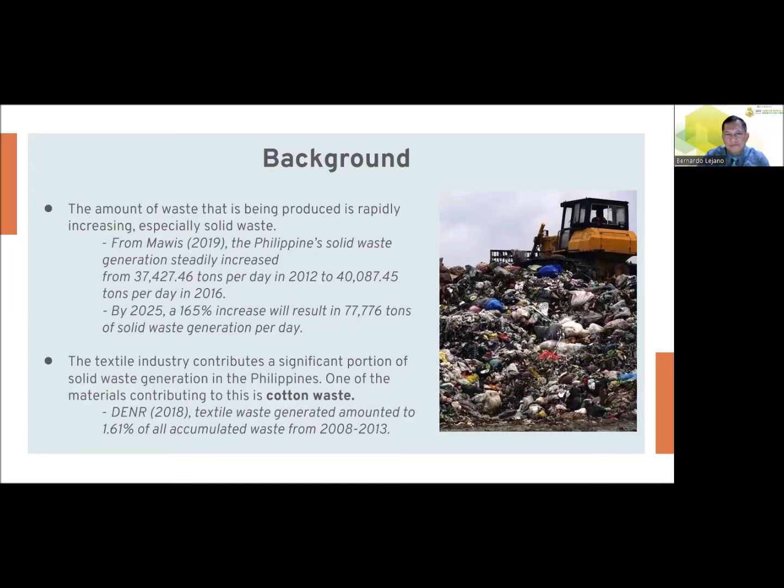The construction industry is also a major contributor to pollution, producing 39% of the world's CO2 emissions, and this pollution is expected to increase as more land develops. In response, innovative and environmentally friendly materials are being developed with two goals in mind: one, to improve performance, and second, to reduce the amount of pollution generated in production.

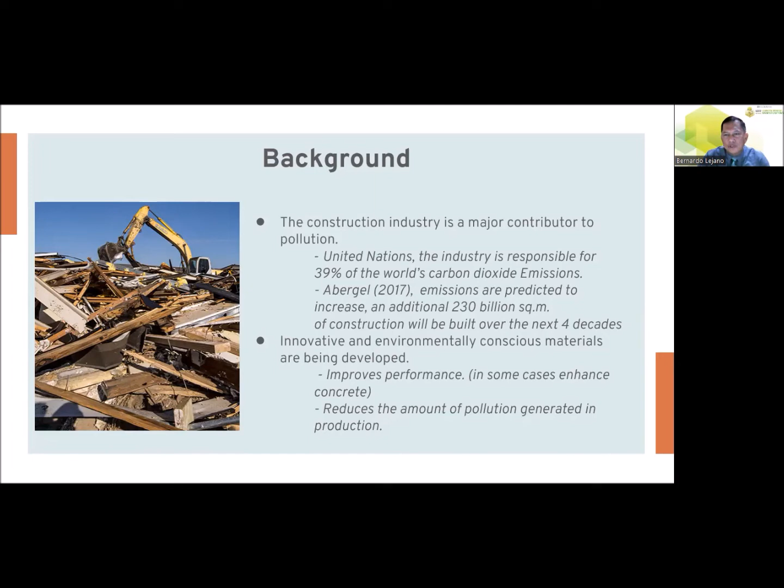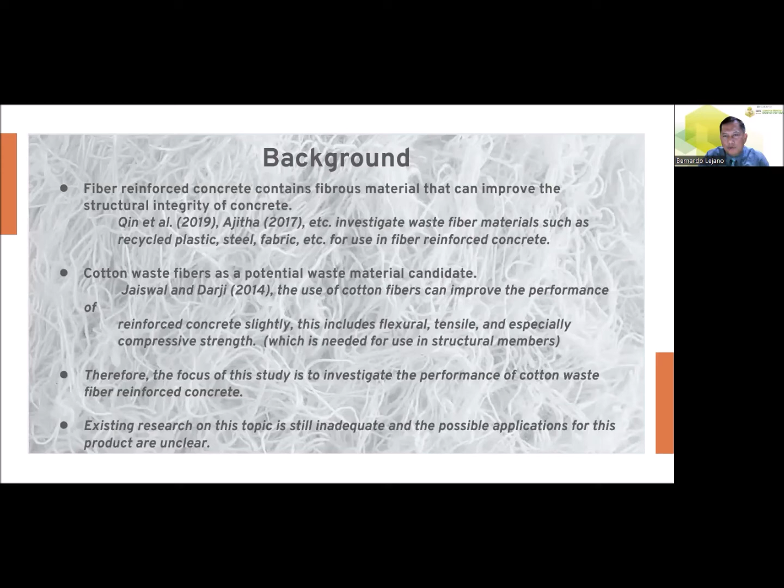One of these innovations is the introduction of waste fibers in concrete. Cotton fiber reinforced concrete in particular showed potential in the few existing studies on the topic. In light of this, we decided to investigate the performance of cotton waste fiber reinforced concrete.

So, in order to address the problem of waste and pollution generated by construction, cotton waste fibers are researched to find out if they can be proven as a reliable construction material, as this would greatly reduce the amount of cotton waste.

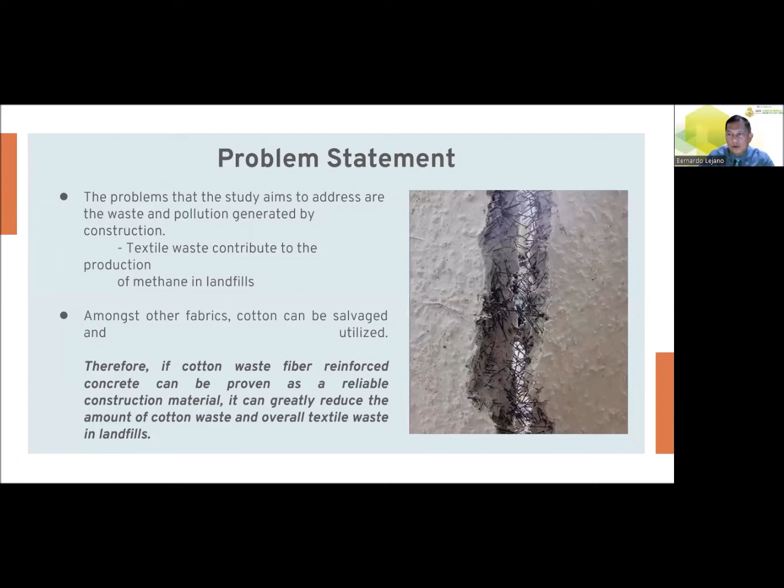The main objective of this study is to analyze the use of cotton waste fibers as reinforcement in conventional concrete. The specific objectives are: one, to evaluate the workability of varying amounts of waste cotton in concrete; two, to evaluate the compressive strength of varying lengths of cotton waste fiber in concrete with a target compressive strength of 21 megapascal; three, to evaluate the splitting tensile strength of varying lengths of cotton waste fibers in concrete; and four, to conduct a cost analysis comparing waste cotton fiber reinforced concrete to conventional concrete to find the more economical material.

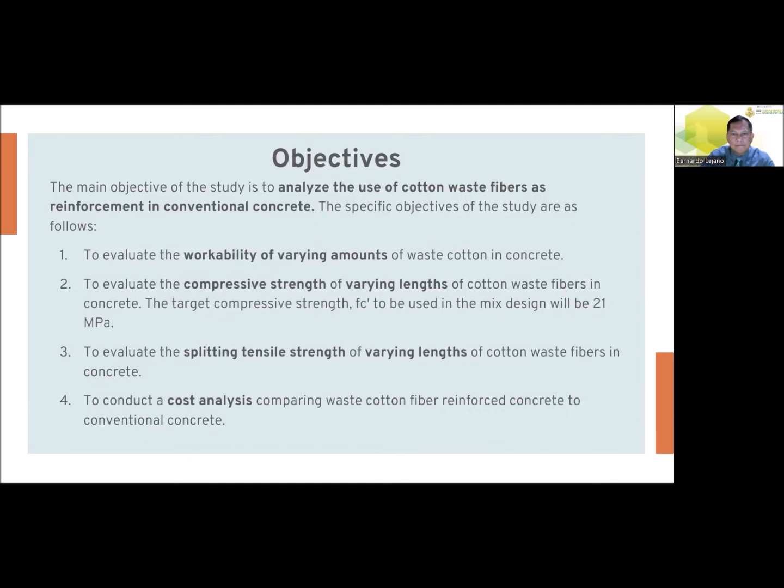As for the next part, here's where the review of related literature will be discussed. A table summary of the parameters and the related literature chosen was created to see the types of fiber used, the fiber amount considered, and the fiber length chosen across all the studies. It is seen that the material used varies.

Fiber materials used in the related literature are polypropylene, cotton, nylon, wool, jute, and oil palm fibers. As for the fiber amounts considered, the amount seen is based on cement weight, concrete weight, or volume of batch, and can vary from 0.0% to 1.8% depending on the study.

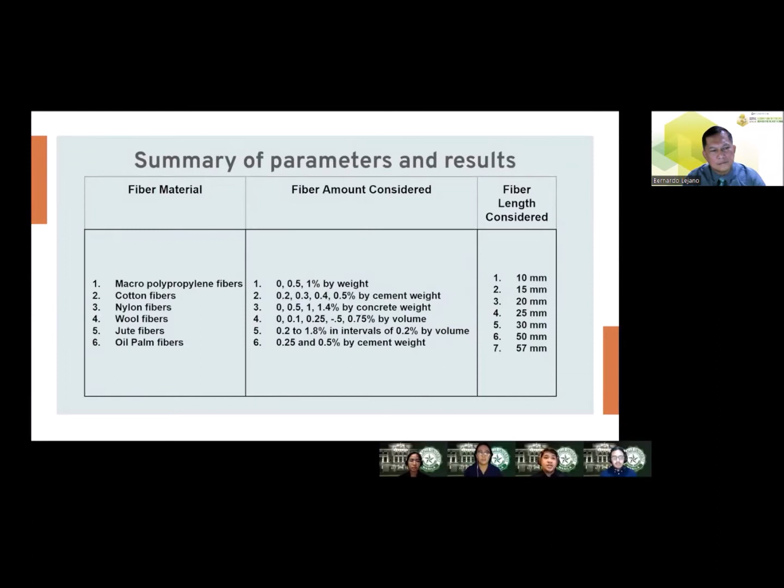Across all the literature, specific fiber lengths were studied as well, ranging from 10 mm to 57 mm depending on the study. It is to be noted that the related literature regarding cotton fibers does not consider varying fiber lengths.

For our research methodology and design, the research method involves analyzing how waste cotton fibers affect the strength properties of concrete through the use of ASTM standard testing methods. The independent variables include the water to cement ratio, length of fibers, and amount of fibers, and these variables will be checked to see if they affect the testing properties of cotton reinforced concrete.

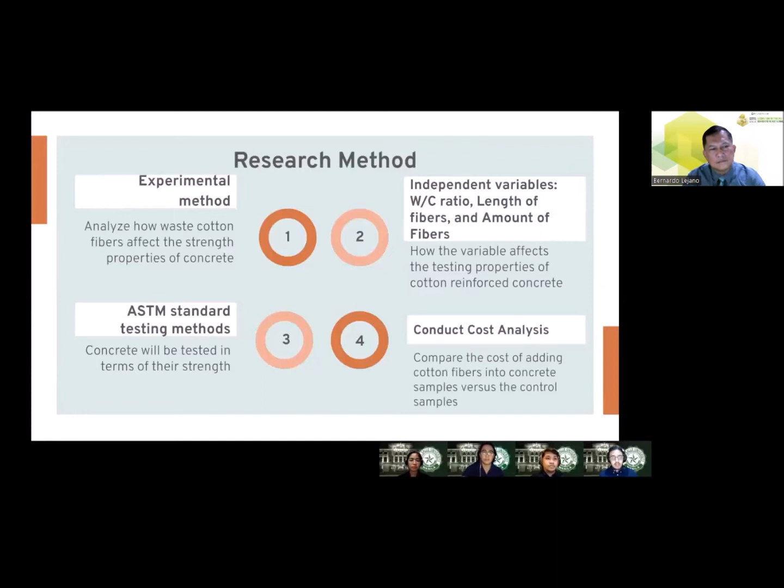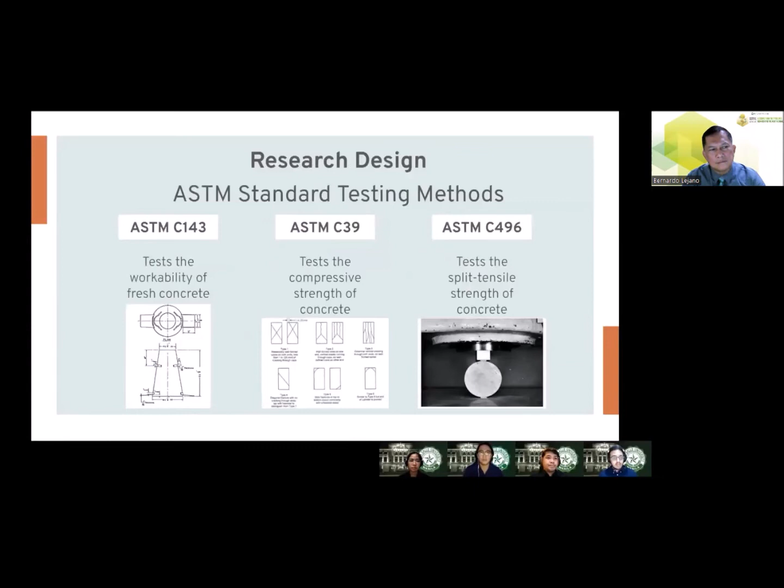Finally, a cost analysis will be conducted to determine the cost effectiveness of different concrete samples versus the control samples. There are two stages to the experimental method, the first being the workability test to determine the samples to be used for the second stage, which includes the compressive and split tensile strength tests.

The dimensions of the concrete samples for both the compressive and split tensile strength test will make use of 150 millimeters in diameter and 300 millimeters in height.

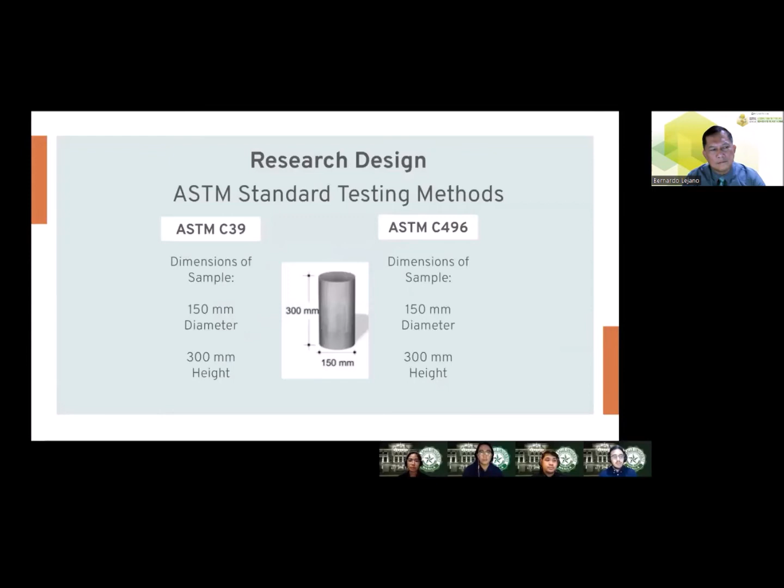As previously mentioned, these are the independent variables, and in order to test the effect of these variables on the strength properties of concrete, a control of conventional concrete will be made.

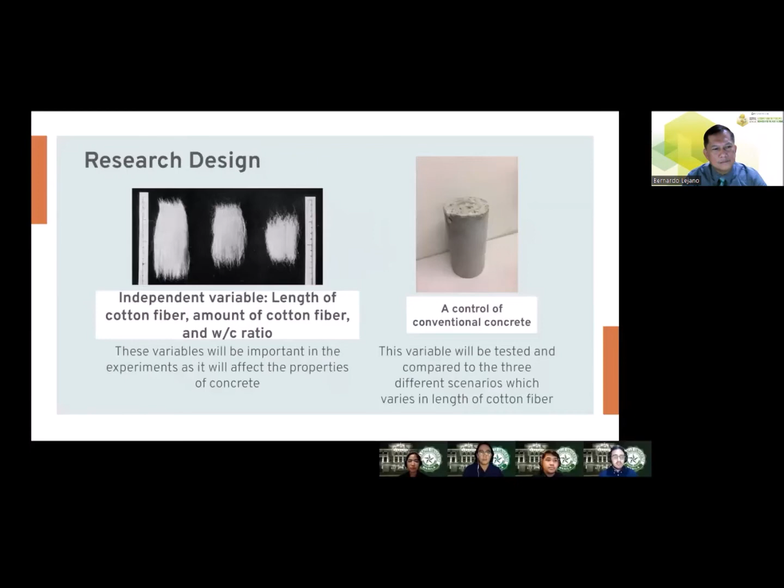Stage one determines the water to cement ratio to be used for stage two. For stage two, each case refers to the chosen water to cement ratio of the previous stage. As seen for each case, a compressive strength test and a split tensile strength test is required.

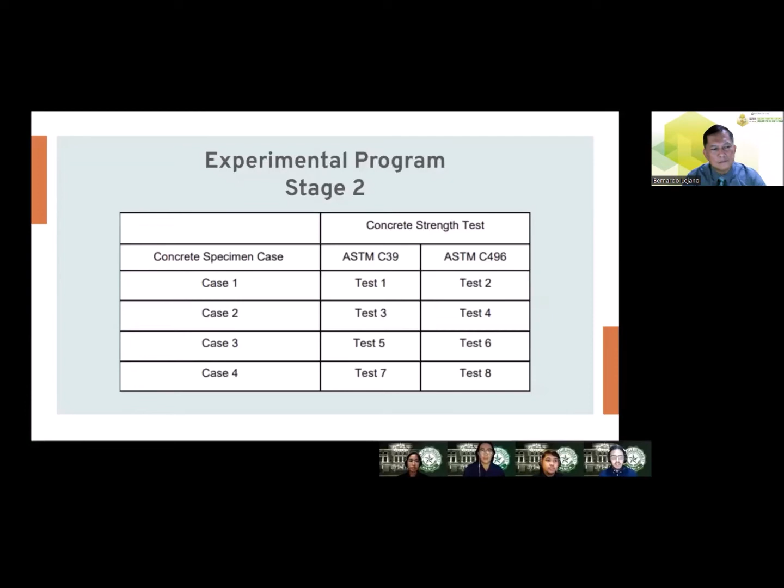From the previous table, there are 4 cases per strength test, and 5 trials were conducted for each case, which totaled to 40 total trials for stage 2.

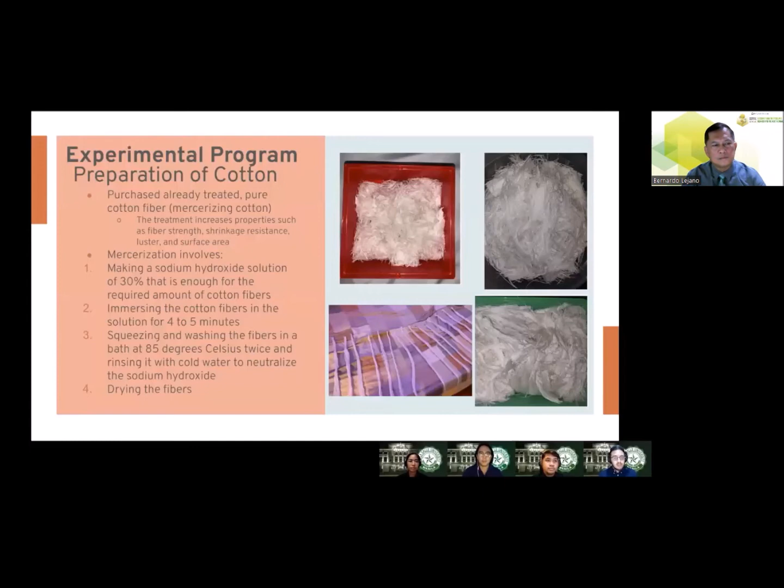For the preparation of cotton, the cotton used for the experiment was already treated using mercerization, which increases the fiber's strength, shrinkage resistance, luster, and surface area of cotton. Mercerization involves immersing the cotton fibers in a sodium hydroxide solution of 30%.

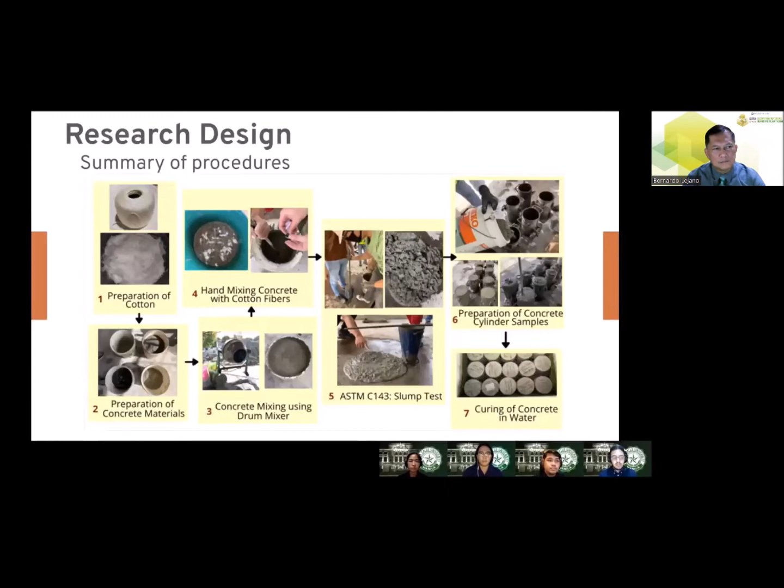For the summary of procedures, start with the preparation of cotton, mixing of concrete, transferring the mix to industrial pails to distribute the fibers evenly, conducting the slump test, and then the preparation and curing of cylindrical concrete samples. After that, the samples were then placed in a compression test and a split tensile test.

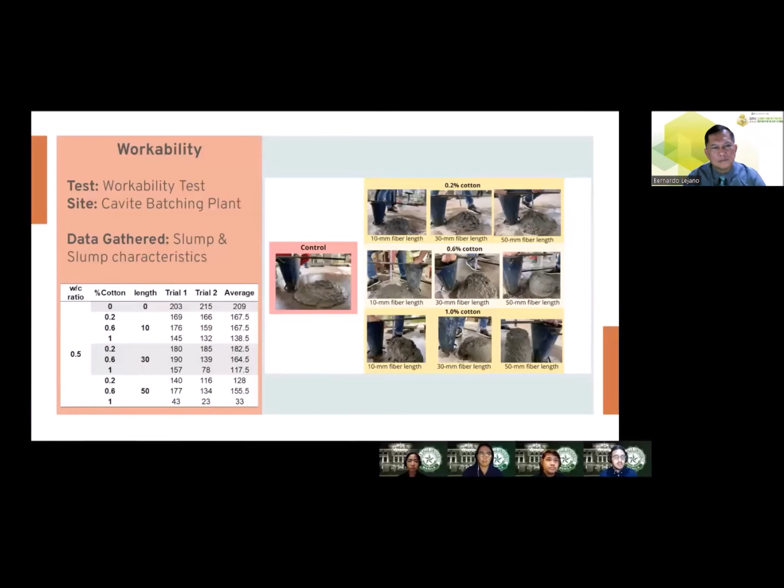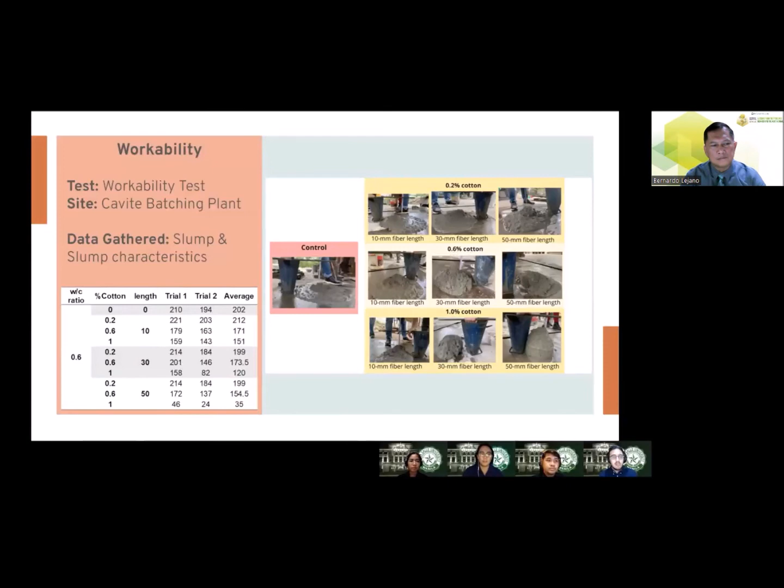For the second set of results are the workability results of the water to cement ratio of 0.6 with varying amounts of cotton and fiber lengths. For each case, based on the independent variables, 2 trials were conducted and the average was obtained.

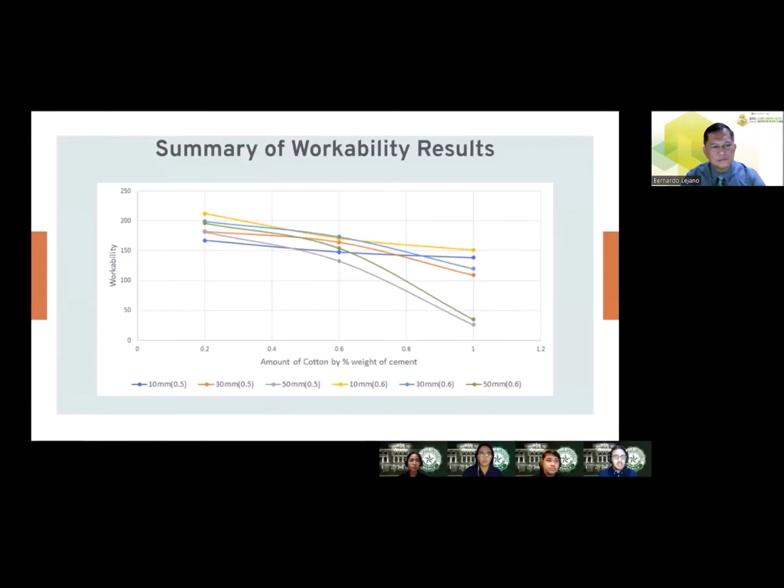Based on the results, it can be observed that the higher water to cement ratio yields a higher workability, and that the increase in the ratio of water in the mix resulted in an increase in the workability. It can also be observed that the workability decreases as more cotton is added into the mix, and there is a steeper decline in workability for longer cotton fibers as more cotton is added.

Based on the graph, the 0.6% amount of cotton yielded the best results when it comes to achieving the target slump. Therefore, this was used for stage 2. As for the water to cement ratios, the 0.6 water to cement ratio was adopted for the concrete cylinders for stage 2, as this showed the higher workability.

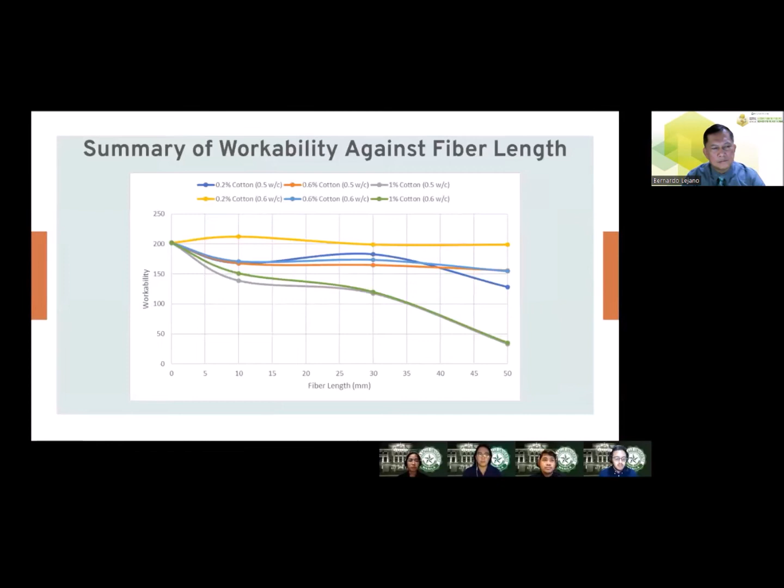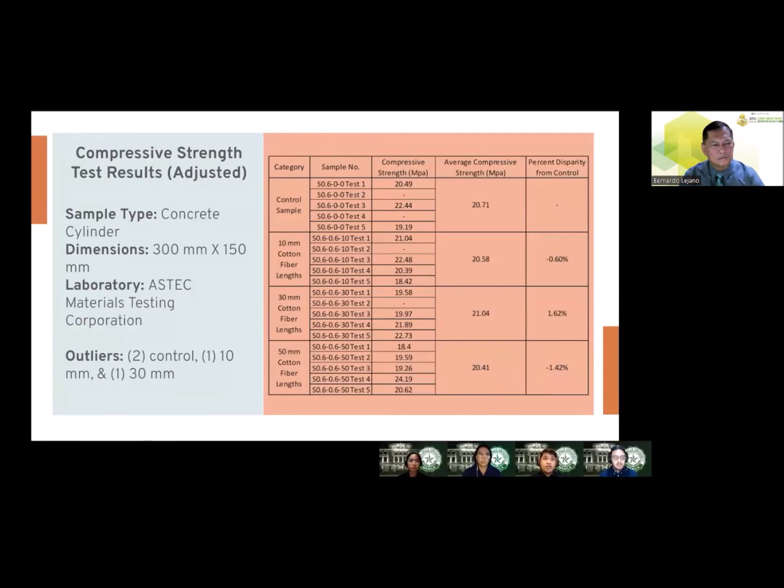To further visualize the differences in the strength, here is a graph that shows the comparison of the 4 cases. The results show that the use of 30 mm cotton fibers yielded the highest compressive strength, while the use of 50 mm yielded the lowest.

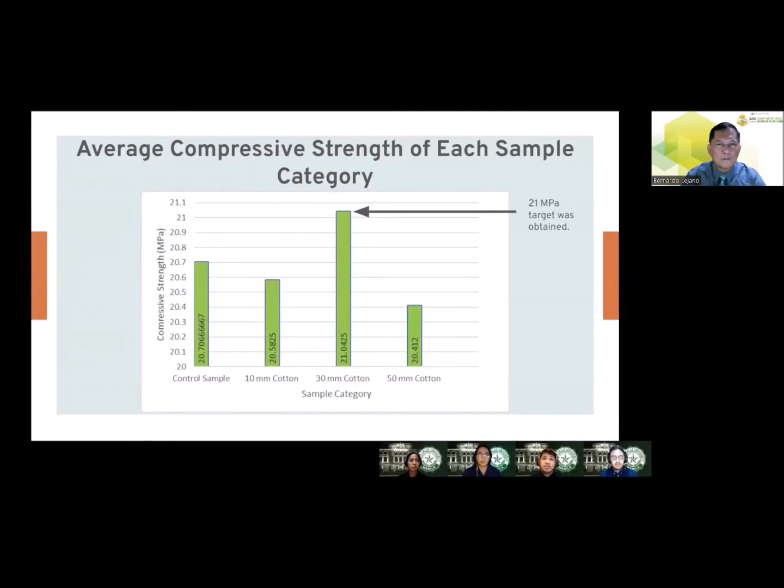Though the differences between the cases are minor, it is to be noted that the 30 mm case reached the 21 MPa target of the study.

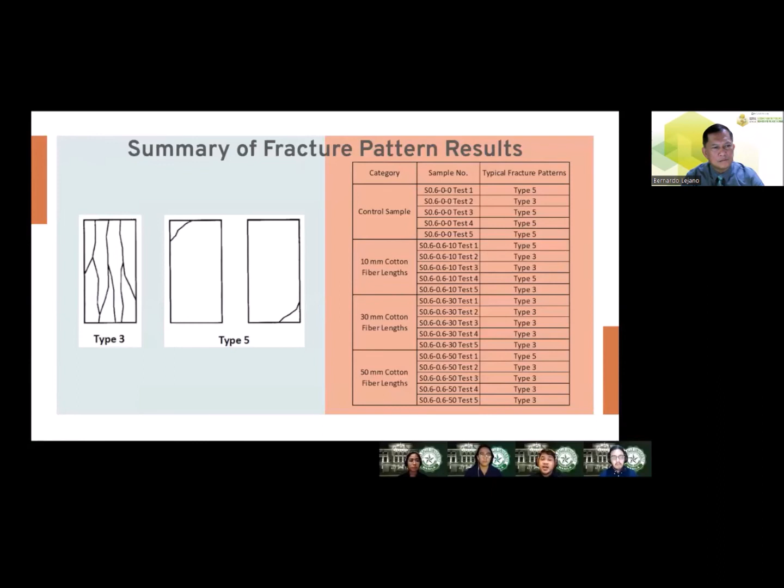Here is a summary of the fracture patterns that were taken from the results given by the lab. Type 3 fracture patterns is abundant between all samples, and type 5 fractures were also present. It is to be noted that 4 out of 5 samples in the control case practiced type 5 failure, and type 5 failures were also seen once in the 10 mm case and the 50 mm case.

As for the split tensile test results, the samples were tested in the DLSU STRC structural laboratory.

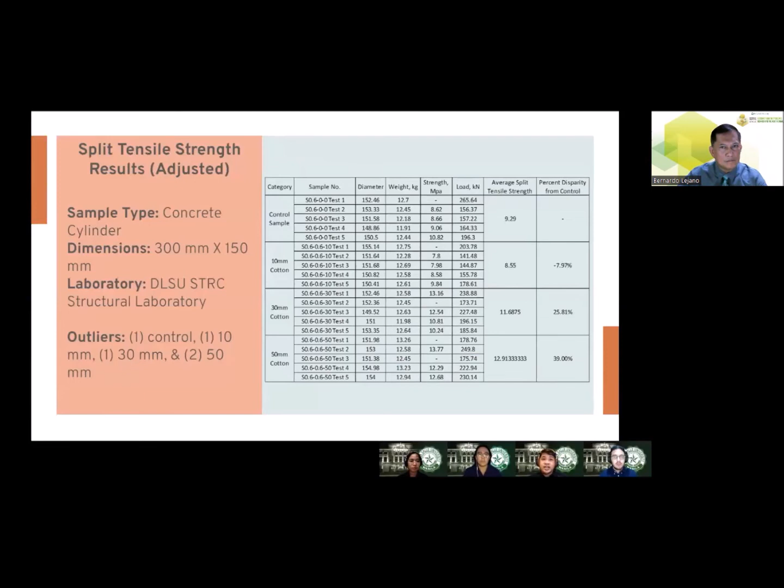The results show that the use of 50 mm cotton fibers yielded the highest split tensile strength, while 10 mm yielded the lowest. It is to be noted that the 10 mm fibers do not benefit the split tensile strength of concrete, while longer fiber lengths prove to have an adequate increase of split tensile strength, with 50 mm being the highest.

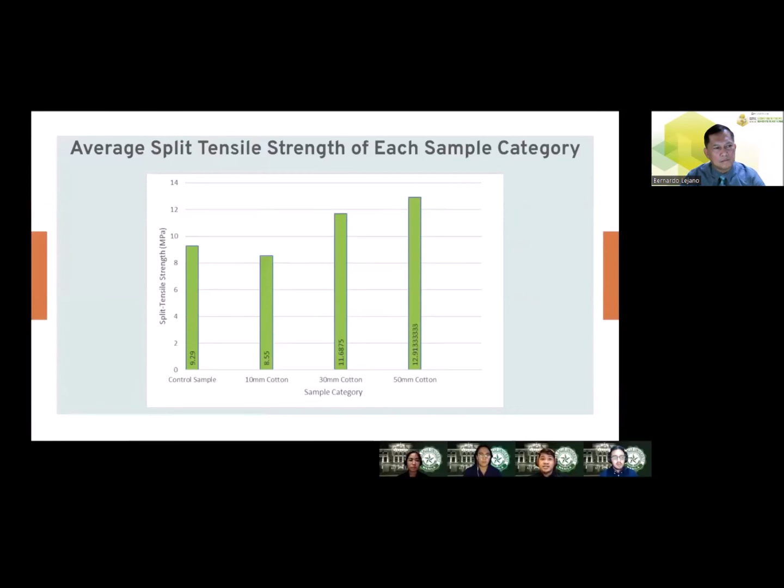In our cost analysis, the main comparison will come from the amount of cotton fiber treatment used in the concrete mix for every cubic meter. Since the concrete materials will have the same volume of concrete mix for every fiber length variation and control samples, the only deciding factor for a cost difference will come from the cotton fiber treatment, assuming that the cotton fiber to be treated is waste.

In terms of the cotton fiber treatment, it was mentioned earlier that the cotton fibers were purchased having already undergone the mercerization process. To give an accurate cost comparison for the treated fibers, the treatment process had to be analyzed in terms of cost, comprising sodium hydroxide and water.

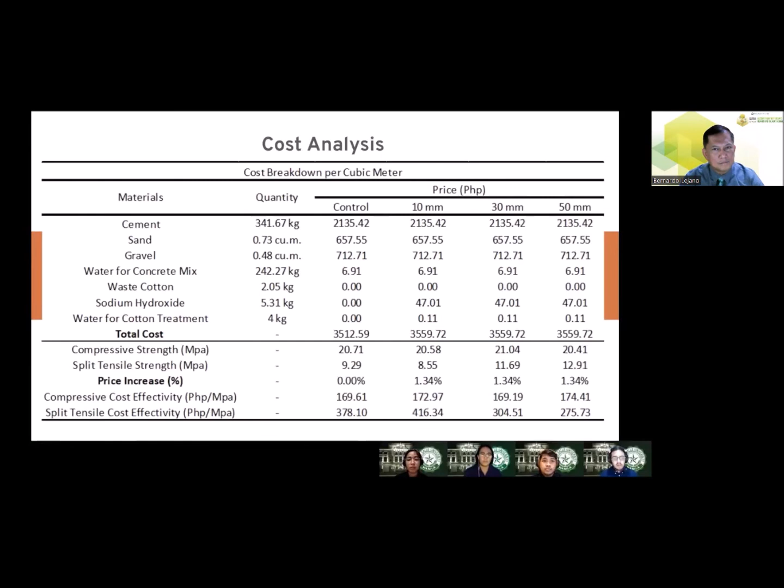Having done the cost effectivity analysis, it was observed that for compressive strength, 30 mm is the most cost effective, having it lower than the control. In terms of split tensile strength, 30 mm and 50 mm were found to be the most cost effective, having it lower than the control.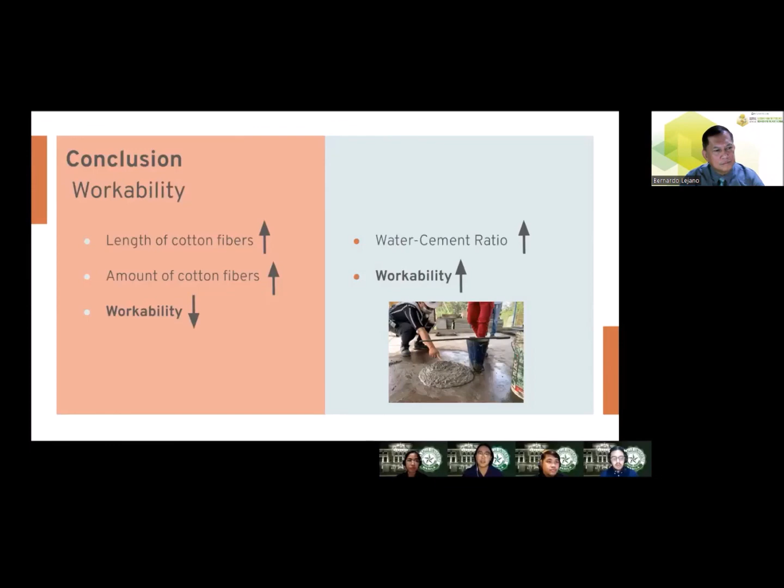Next, we have the conclusion. Based on the results of the slump test, the addition of longer cotton fibers and the increase of the amount of cotton fibers used resulted in a decrease in workability. Aside from this, the results showed that the workability values of the 0.6 water to cement ratio concrete mix was higher compared to the workability values of the 0.5 water to cement ratio.

The results of the compressive test showed that the 30 mm concrete samples had the highest strength out of all the other specimens. The control specimens had higher strength than the 10 mm samples and the 50 mm samples. However, the strength did not vary widely, seeing that the percent disparity of all the samples to the control are less than 2%.

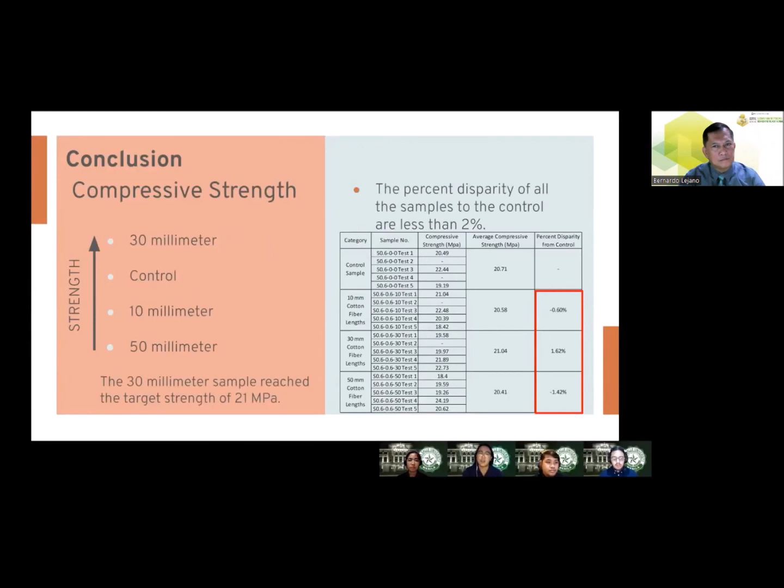Therefore, the addition of fibers and varying length of fibers do not significantly affect the compressive strength of concrete. The results of the split tensile tests show a more significant disparity between the specimens. The 50 mm samples had the highest strength, followed by the 30 mm samples. The average strength of each of the two specimens were higher than that of the control specimen. However, the 10 mm samples had the lowest average strength.

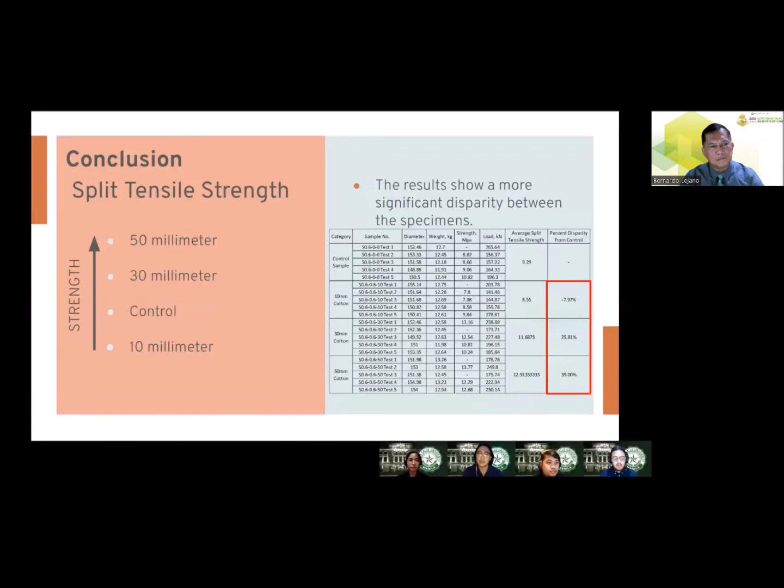Therefore, the trend seen is that longer fibers will contribute greater split tensile strength, and concrete with fibers that are too short will be weaker than traditional concrete.

Since the difference in compressive strengths is minor, workability and split tensile strengths are the main metrics of comparison. The results show that 50 mm concrete has the highest tensile strength but is less workable as fresh concrete and has the lowest compressive strength.

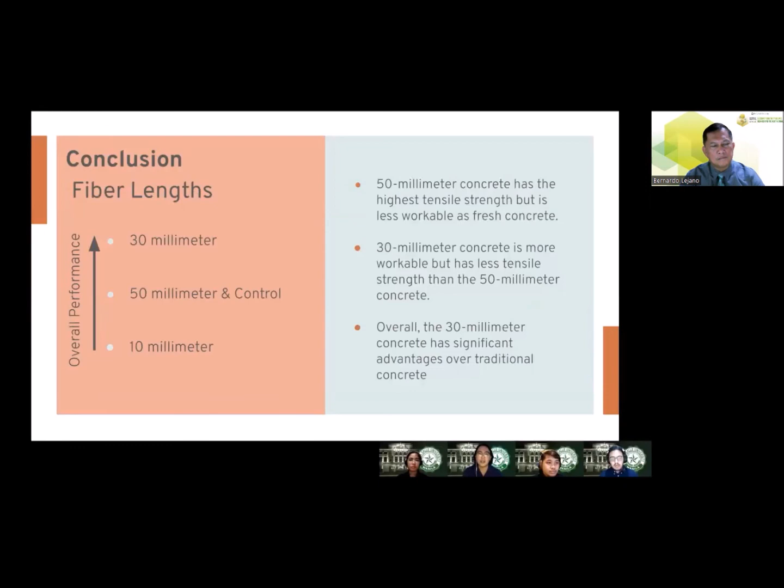On the other hand, the 30 mm concrete is more workable and has the highest compressive strength, but has less tensile strength than the 50 mm concrete. Overall, the 30 mm concrete has significant advantages over traditional concrete.

So again, this research is about the utilization of natural cotton waste fiber in concrete, investigating the optimal fiber length and amount based on split tensile and compressive behavior. Hopefully, this research would contribute to the reduction of waste and enhancing the properties of concrete that we use in construction.